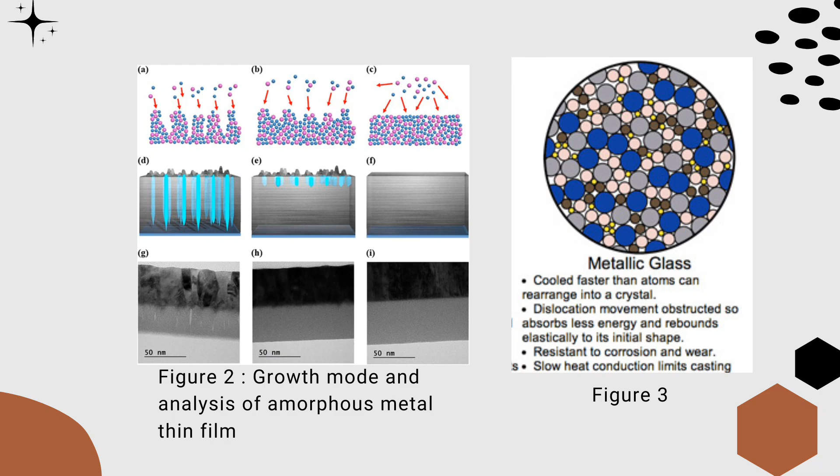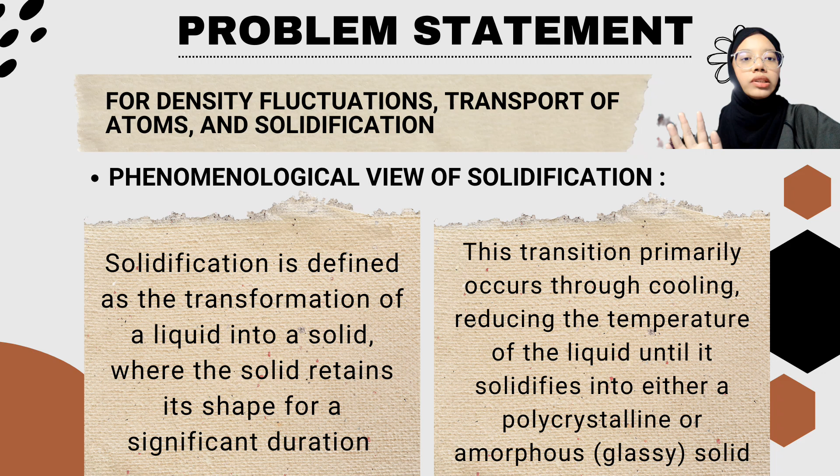For density fluctuations, transport of atoms, and solidification, it discusses the process of solidification from both a phenomenological and atomistic perspective, highlighting the transition from liquid to solid phases in material science. Here's a summary of its key points. Number one is the phenomenological view of solidification. Solidification is defined as the transformation of a liquid into a solid, where the solid retains its shape for a significant duration. This transition primarily occurs through cooling, reducing the temperature of the liquid until it solidifies into either a polycrystalline or amorphous solid.

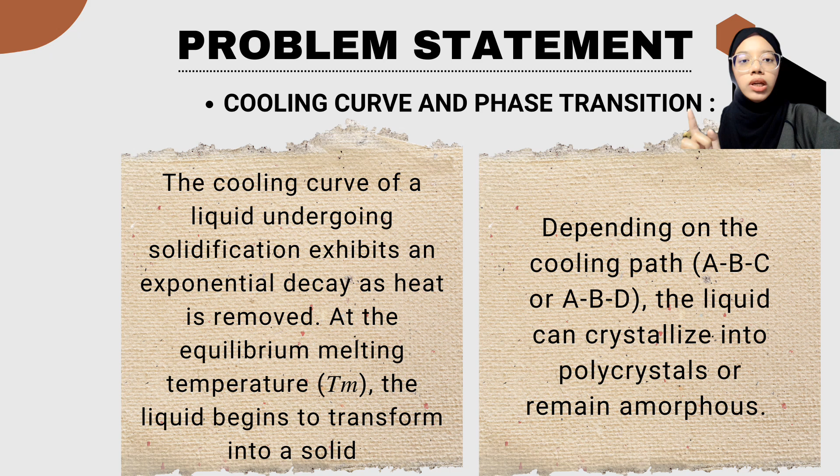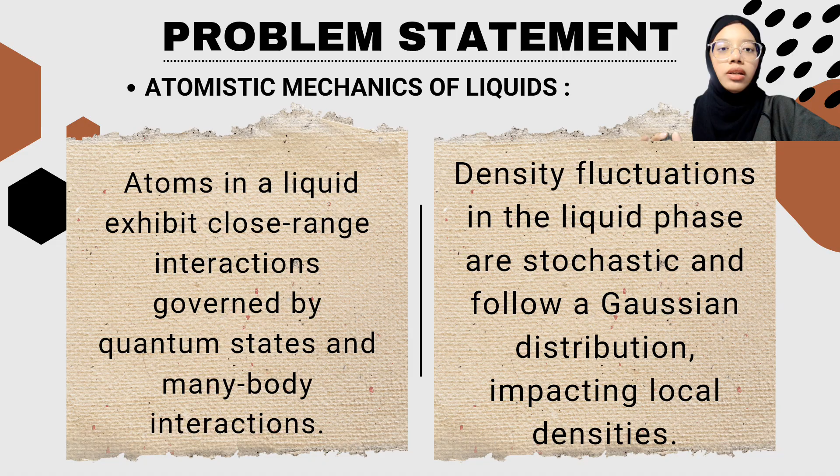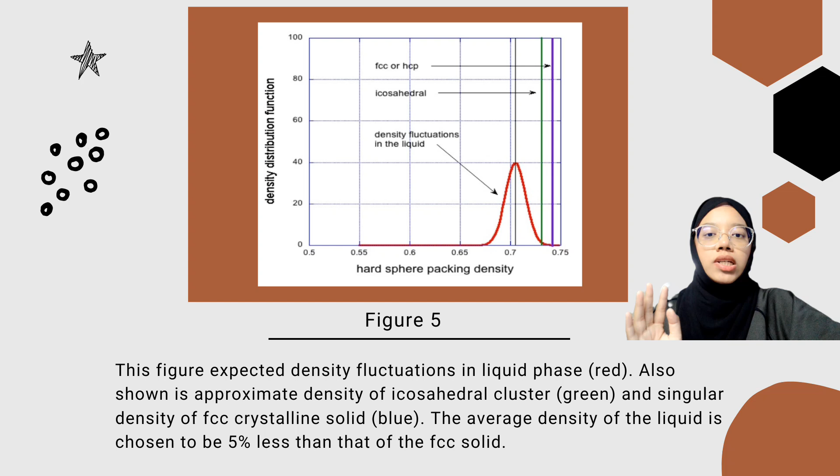The third one is the atomistic mechanics of liquids. Atoms in a liquid exhibit close-range interactions governed by quantum states and many-body interactions. Density fluctuations in the liquid phase are stochastic and follow a Gaussian distribution, impacting local density. You can see the figure below: expected density fluctuation in the liquid phase in the red line, the approximate density of the icosahedral cluster in the green line, and the singular density of the FCC crystalline solid in the blue line. The average density of the liquid is chosen to be 5% less than that of the FCC solid.

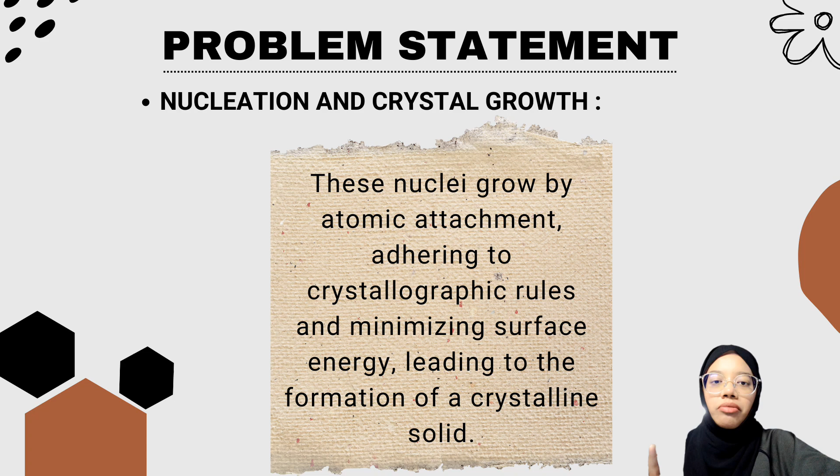And then, formation of icosahedral clusters. It has been noted before that the maximum packing fraction of maximally random packed hard spheres is approximately 0.64, whereas the packing fraction of an FCC or HCP arrangement is 0.74. The difference is over 15%, in stark contrast to systems such as pure metals, gold, copper, nickel, in which the interatomic interactions are close to centrosymmetric. The liquid and solid densities at their melting points are very close.

For example, pure copper at its melting temperature has a liquid density of 7.992 and a solid density of 8.352, a change of only 4.51%. But in other systems, it is much higher. For instance, for polyethylene, it is 21%.

And to solve this problem, formation of icosahedral clusters was used, where metallic liquids near freezing points often contain icosahedral clusters with higher local packing densities than the surrounding liquid. These clusters serve as precursors to crystallization or may persist as amorphous structures depending on conditions.

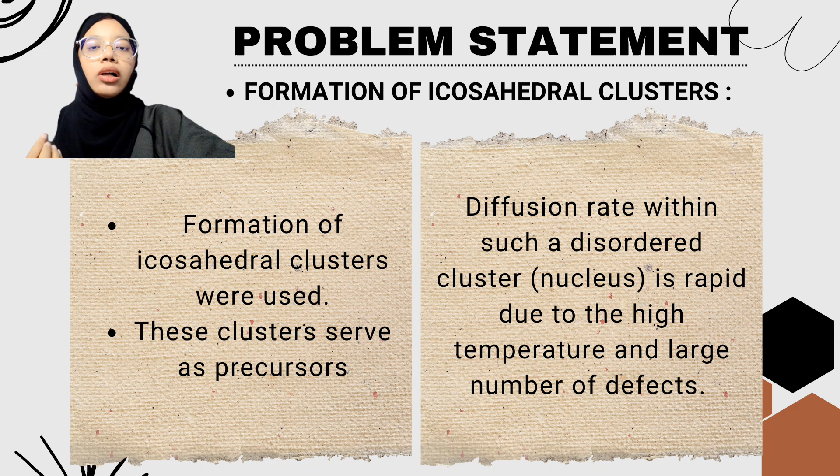Diffusion rate within such disordered clusters is rapid due to the high temperature and large number of defects. In addition to the classical vacancy-atom exchange mechanism for diffusion, there are alpha and beta mechanisms for atomic rearrangement. These involve relative movement of atoms in tetrahedral arrangements, characteristic of icosahedral packing, which lead to configurational and/or chemical composition changes requiring little free volume, as shown in the figure.

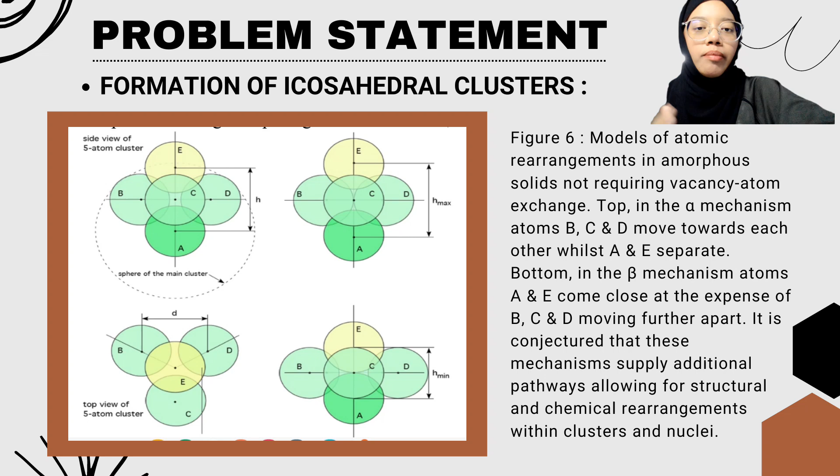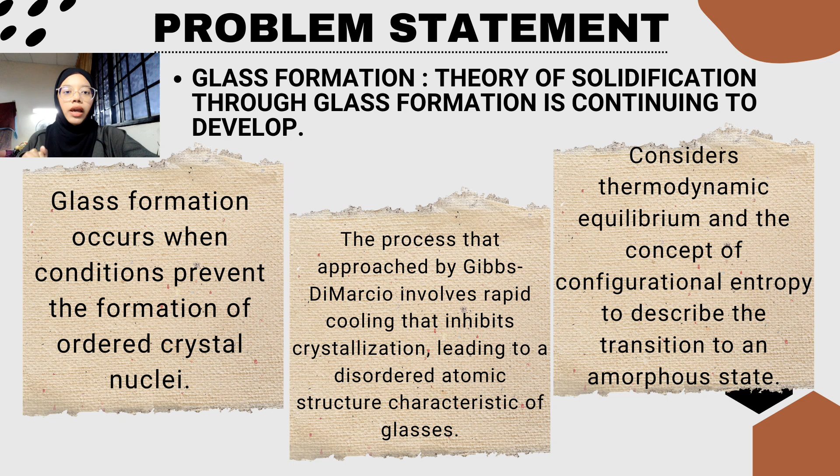In addition, the theory of solidification through glass formation is continuing to develop. Glass formation occurs when conditions prevent the formation of crystal nuclei. The approach by Gibbs-DiMarzio involves rapid cooling that inhibits crystallization, leading to a disordered atomic structure characteristic of glasses. It also considers thermodynamic equilibrium and the concept of configurational entropy to describe the transition to an amorphous state.

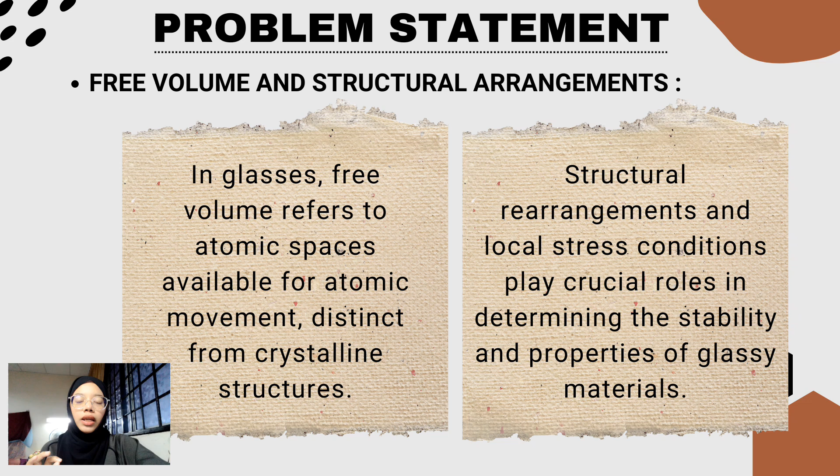The seventh point is free volume and structural arrangement. Speedy amended the Gibbs-DiMarzio argument by introducing an additional parameter for the glass, which described the dependence of the glass structure on its volume and enthalpy. In glasses, free volume refers to atomic spaces available for atomic movement, distinct from crystalline structures. Structural rearrangement and local stress conditions play crucial roles in determining the stability and properties of glassy materials.

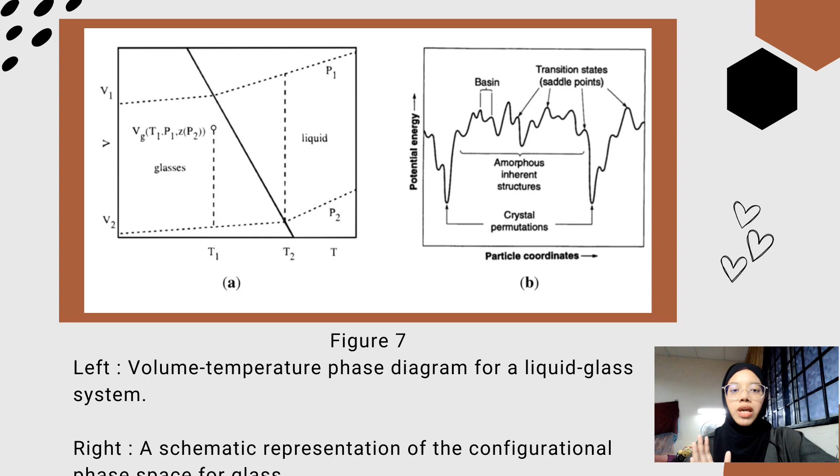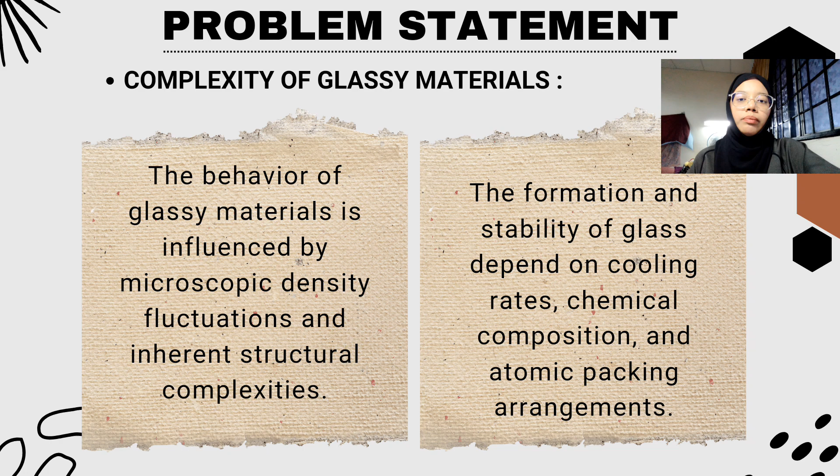In the figure, the left one is a volume-temperature phase diagram for a liquid-glass system. The right one is a schematic representation of the configurational phase space for glass. The eighth point is complexity of glassy materials. The behavior of glassy materials is influenced by microscopic density fluctuations and inherent structural complexities. The formation and stability of glass depend on cooling rates, chemical composition, and atomic packing arrangement.

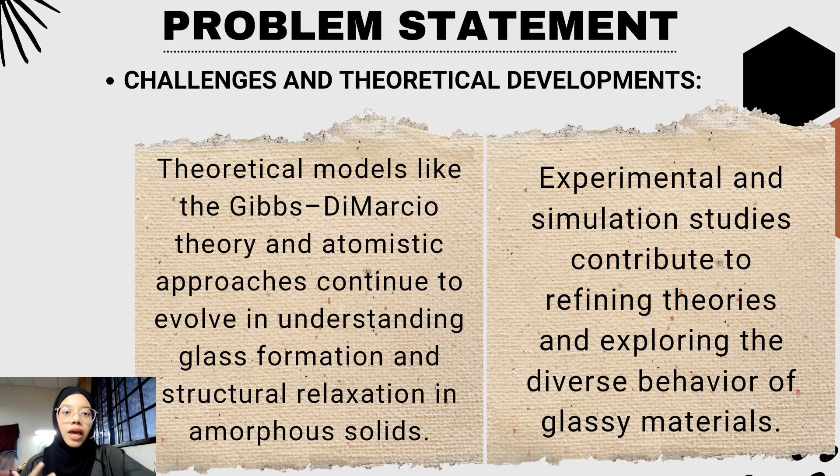And the last point is challenges and theoretical development. Theoretical models like the Gibbs-DiMarzio theory and atomistic approaches continue to evolve in understanding glass formation and structural relaxation in amorphous solids. Experimental and simulation studies contribute to refining theories and exploring the diverse behavior of glassy materials.

The aim of this article is to develop a comprehensive theoretical model for atomic structures. One of the primary objectives is to develop a comprehensive theoretical model that accurately describes the atomic structures of amorphous materials. This model should account for the inherent randomness and lack of long-range order in these materials. The second one is to incorporate geometric and topological features. The model aims to integrate geometric and topological features that are unique to amorphous materials, distinguishing them from the regular periodic structures of crystalline solids.

The next aim is to differentiate amorphous from crystalline solids. Another key objective is to create a clear distinction between amorphous and crystalline solids, moving away from the traditional view that sees amorphous materials as merely disordered crystalline structures. This differentiation is crucial for advancing the study and application of amorphous materials.

Next, improve understanding of material properties and predict physical and chemical properties. The objective is to improve the understanding and prediction of the physical and chemical properties of amorphous materials. This includes properties such as mechanical strength, thermal stability, and electrical conductivity, which are influenced by their irregular atomic structures. Enhance material characterization techniques: the goal is to develop and refine techniques for characterizing the atomic structure and properties of amorphous materials, facilitating more accurate and detailed analysis.

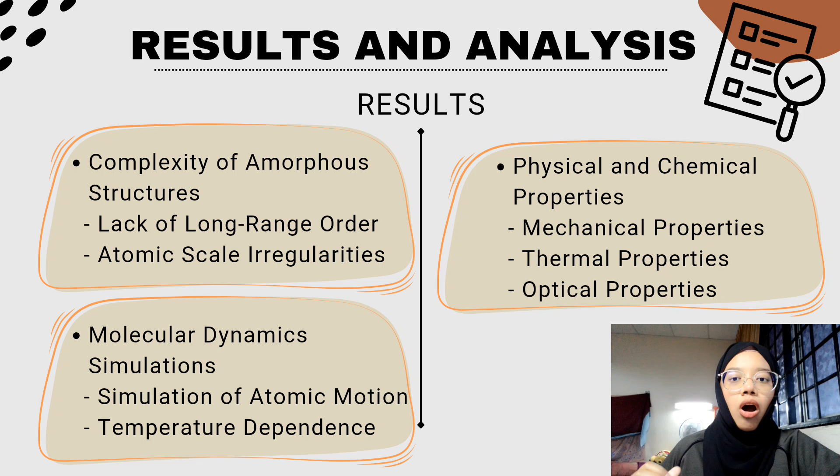For the optical properties, amorphous materials are found to have distinct optical properties such as transparency and unique refractive indices, which are influenced by their disordered atomic structures. These properties make them useful in various optical applications, including lenses and optical fibers.

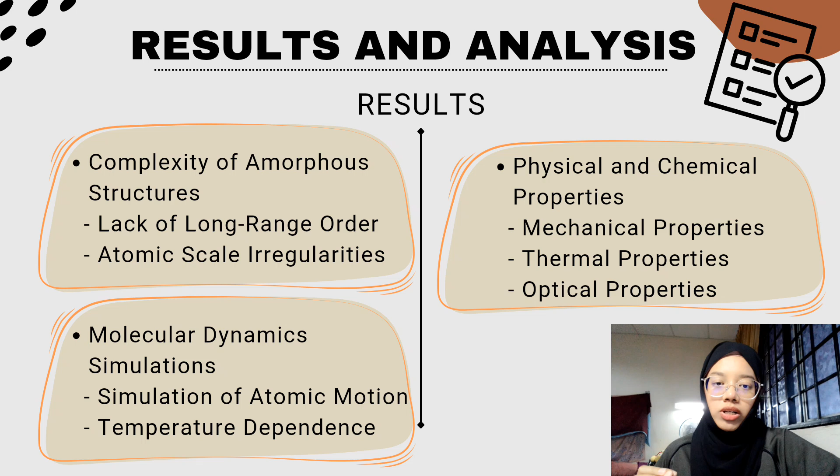What I got in analysis is two analyses. The first is modeling limitations and advancements. Limitation of traditional models: the results indicate that traditional crystallographic models are inadequate for describing the atomic structures of amorphous materials. The lack of periodicity and the complex atomic interactions in amorphous materials require new modeling approaches.

Advancement in modeling techniques: the study highlights the importance of using advanced modeling techniques such as molecular dynamics simulation and geometric packing models to gain a better understanding of the atomic arrangement and properties of amorphous materials. These techniques provide a more accurate representation of the disordered nature of these materials.

The second analysis I got is future research direction. Future exploration of atomic structures: the analysis suggests that further research is needed to explore the atomic structures of amorphous materials in greater detail. This includes investigating the effects of different compositions and processing conditions on the atomic arrangement and properties of these materials.

Integration of experimental and theoretical studies: the study emphasized the need for integrating experimental and theoretical research to validate and refine models of amorphous materials. This approach will help in developing a more comprehensive understanding of these complex materials and their potential applications.

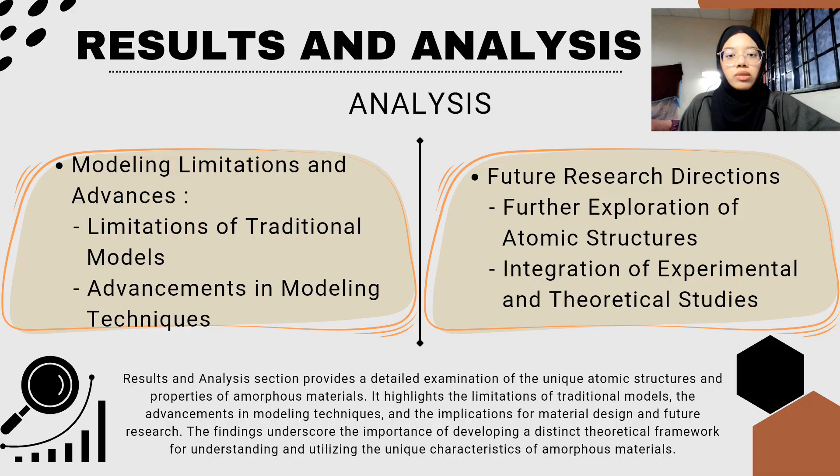The first key point of the conclusion that I've got is that the development of new bulk metallic alloys in the last 20 years, with an extended supercooled liquid region, high thermal stability and superior mechanical properties, has led to a resurgence of research activity in this field, both experimental and theoretical.

The second key point is that the field of amorphous materials, natural and synthetic, is extensive, with widely varying chemistry and chemical bonding. Yet all of these materials display the same structural characteristics, of which the main ones are an amorphous halo in X-ray scattering, a glass transition temperature in thermal analysis, and electric, optical, and mechanical isotropy.

The third one is that a theoretical model of an ideal amorphous solid has been defined, paving the way for the development of a theory of amorphousness. Such a theory will provide a basis for characterization of the amorphousness of materials, a clear definition of amorphous structure on its own terms, and a definition of imperfections in the structure that are characteristic of real amorphous materials.

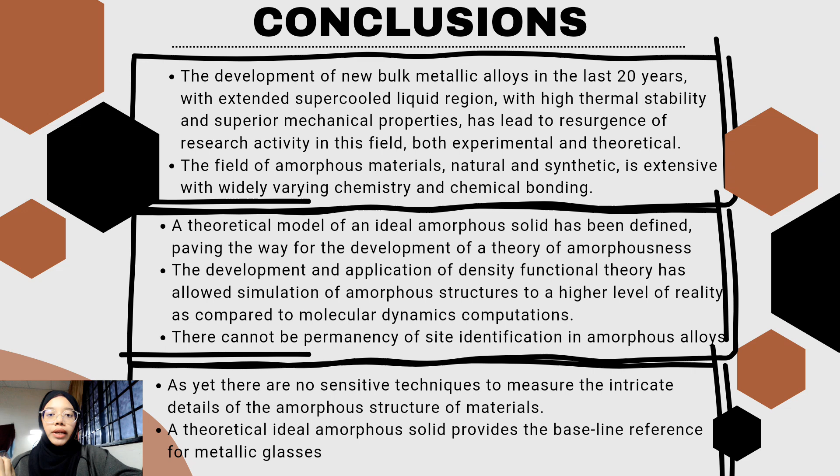The seventh key point: a theoretical ideal amorphous solid provides the baseline reference for metallic glasses. By definition, it contains random packing and no imperfections. The last one is that imperfections in an amorphous solid can increase or decrease average body density depending on the type and content of flaws present.